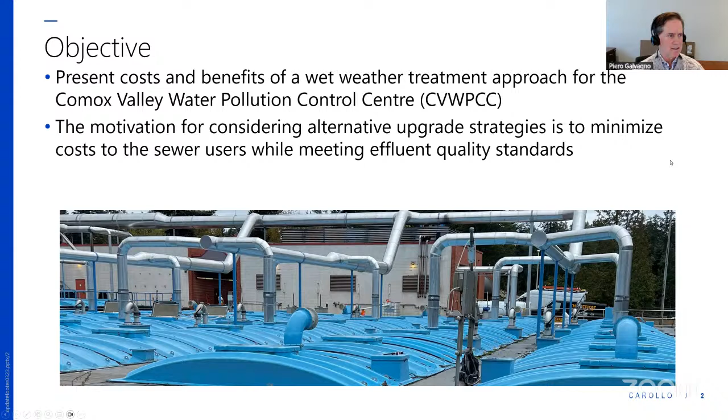So as Chris mentioned, the point of the analysis, the objective was to go into some detail to investigate the pros and cons of a wet weather treatment approach for the Comox Valley Water Pollution Control Center. The motivation came out of considering an alternative to minimize cost to sewer users while continuing to meet effluent quality standards. As a preamble, I wanted to have a few slides to illustrate the problem we're trying to resolve, and why we think in the end that the hybrid approach is the best for the wastewater treatment plant.

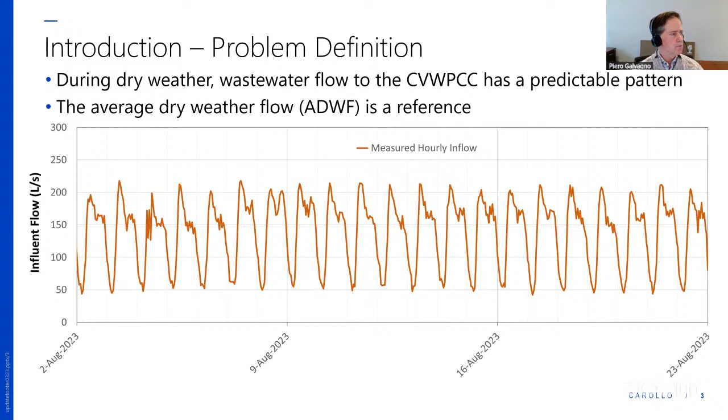So this is dry weather wastewater flow - the wastewater that's generated by the community. This occurs through a period in 2023 through the summertime when there is no rain or groundwater influences. So it's just wastewater, and it's a very regular pattern, very common to treatment plants without a wet weather issue. This is what's known as the average dry weather flow, and it becomes the reference in subsequent slides for how we relate the wet weather, comparing it to the average dry weather flow.

And so this is all flow that the wastewater treatment plant needs to deal with. This chart is kind of the full year of flow to the plant in 2023. What I wanted to illustrate here is that the blue line indicates the regulatory definition of wet weather flow - 2 times average dry weather flow. And what I wanted to illustrate was that most of the flow is below that 2 times average dry weather flow threshold, so it's not wet weather.

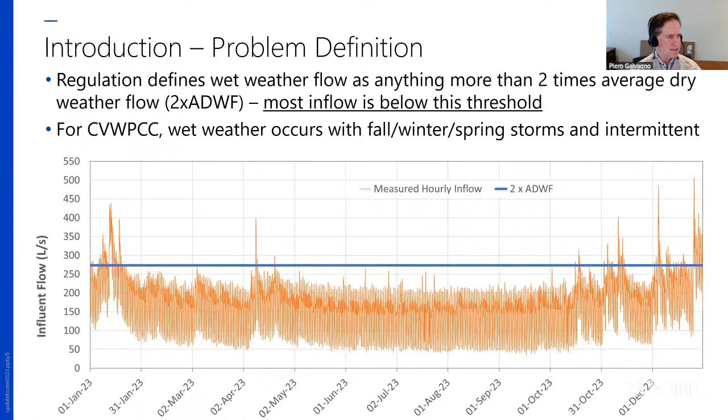So what we wanted to do here was highlight the observation that most of the flow into the plant is below the wet weather threshold. We calculated how much of that volume actually represents wet weather, and historically, over the last 5 years, less than 2.5% of the annual inflow meets that wet weather criterion of 2 times average dry weather flow. So it's a relatively small volume of flow that's wet weather.

However, it has an outsized influence on the infrastructure, on the upgrades of the treatment process. The core of the treatment process is this primary clarifier, bioreactor, secondary clarifier train, and the primary clarifiers and secondary clarifiers are sized based on peak flows. So that 2.5% is really driving the upgrade requirements for primary clarifiers and for secondary clarifiers.

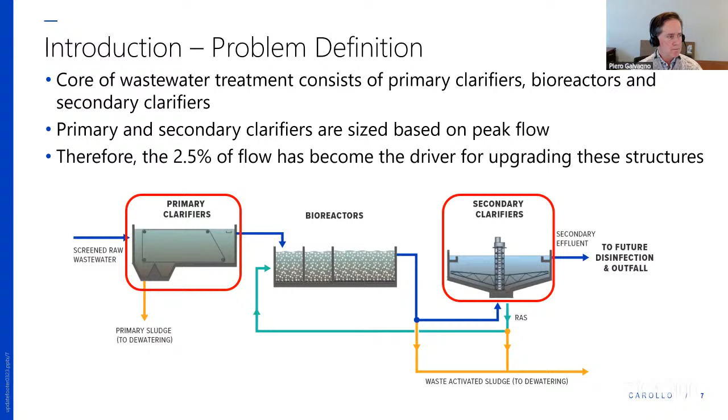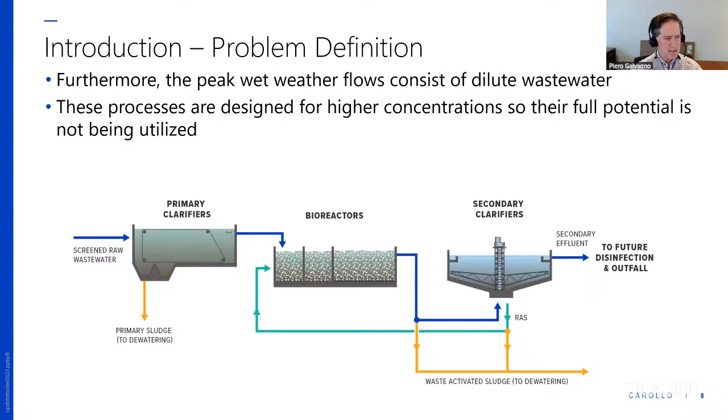And furthermore, I wanted to highlight the fact that wet weather dilutes the wastewater. So what's coming into the plant during that wet weather period is low concentration, but the design of the system is for a much higher concentration of wastewater. So the full potential of the treatment process is not being utilized during a wet weather event. Primary and secondary clarifiers are large concrete tanks with complex piping and associated pumping, so they have a considerable cost when it comes to upgrading.

So as a final slide into the introduction, you look at the aerial photograph of the plant - it's dominated by the secondary clarifiers, primary clarifiers, which are outlined in red, and in between are the bioreactors. The expectation going into the future is that wet weather generated peak flows are expected to continue to grow with population as the collection system expands. That wet weather flow is also going to increase, and adding clarifier tanks is a perfectly logical approach to upgrades, and that's historically how the planning has been done, but it comes at a high cost.

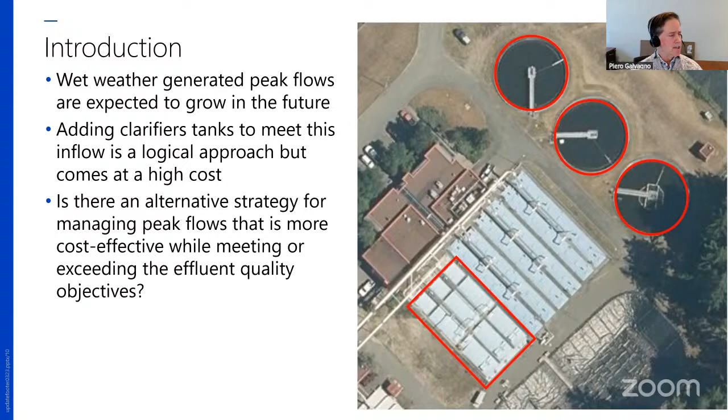So what we want to do is investigate some options that we think could be an alternative strategy for managing those peak flows, and could be more cost effective while meeting or exceeding the effluent quality objectives. That was an important component of this - we want to bring forward options that are the same or better in terms of performance when it comes to meeting the effluent quality objectives.

So there are two options that we brought forward to compare against the baseline option, which is to upgrade conventional primary secondary treatment. The first option is to add a chemically enhanced primary treatment to the baseline option, and the second option is to do this CEPT but also implement a wet weather treatment strategy. I'll describe each of the two options in subsequent slides.

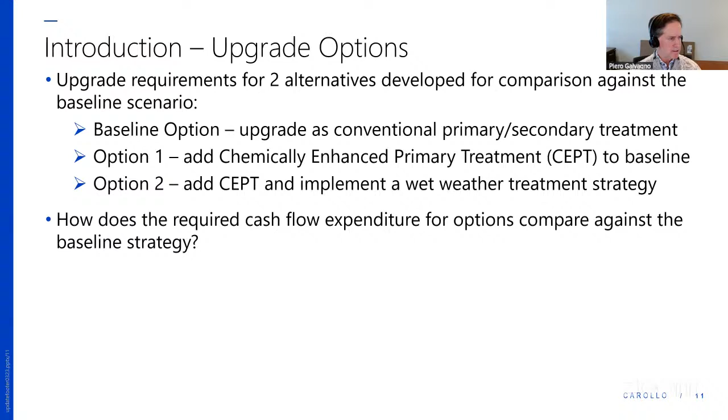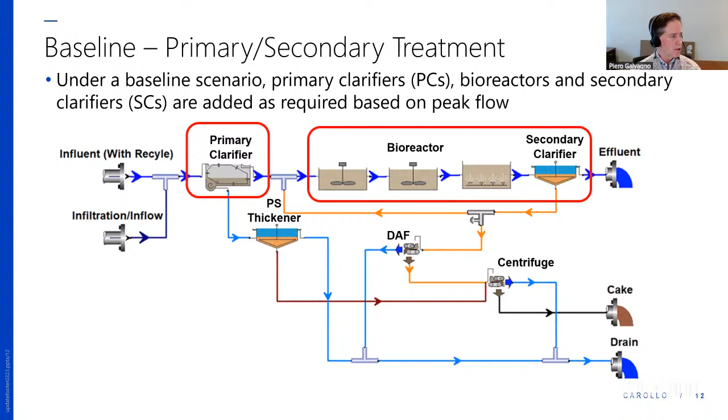Ultimately, what we wanted to do was develop staging plans for each of the three options, then compare how that cash flow for the two alternatives compares against the baseline, and use that as a basis for assessing value. Under the baseline option, we're going to upgrade primary clarifiers, and then the bioreactor and secondary clarifiers, based on the loading as well as the peak flows.

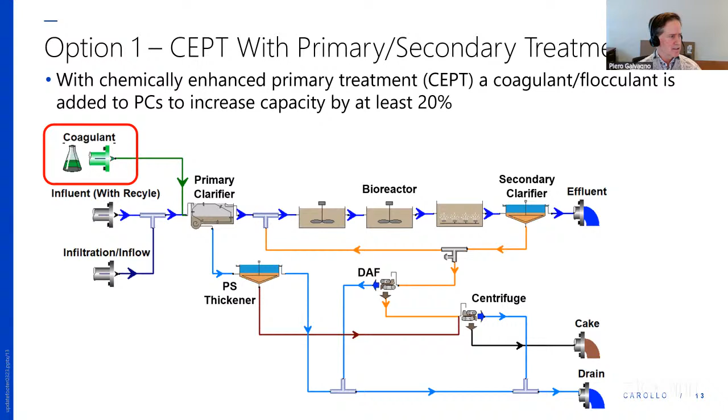Under option 1, this is the chemically enhanced primary treatment. We're adding a coagulant to the primary clarifier, so we're not changing the structure of the primary clarifier. We're using the chemical to give it more capacity, and we think you should be able to get at least 20% more capacity out of the primary clarifier. You're not changing the flow rates, you're just providing more ability for the primary clarifier to meet the settlement objective.

The other feature of this option is that we really only need that chemically assisted sedimentation during the peak wet weather events. So the chemical dosing would only come on when the flow rates exceed that 2 times average dry weather flow threshold, or we're only treating 2.5% of the flow.

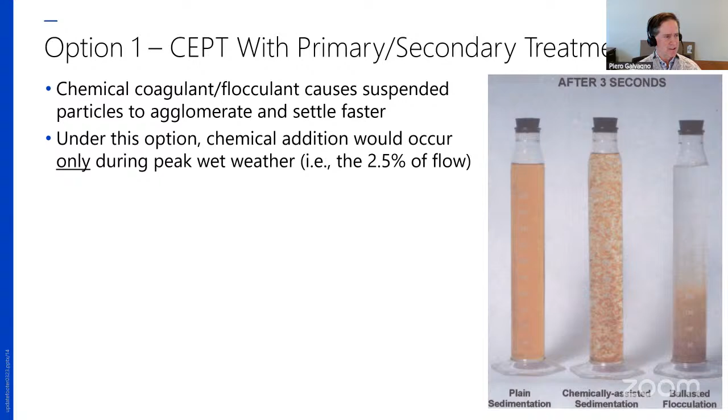Under option 2, the wet weather treatment option, we'd include the high rate wet weather treatment, we'd include the chemically enhanced primary treatment option, but then we'll also provide a bypass around the bioreactor and secondary clarifier, and then we'd add a tertiary filter.

During wet weather, the peak flows greater than that 2 times average dry weather flow would be diverted around the biological treatment and go to the filter, and then it would be the blended filtered bypass as well as the secondary effluent that would go to the outfall.

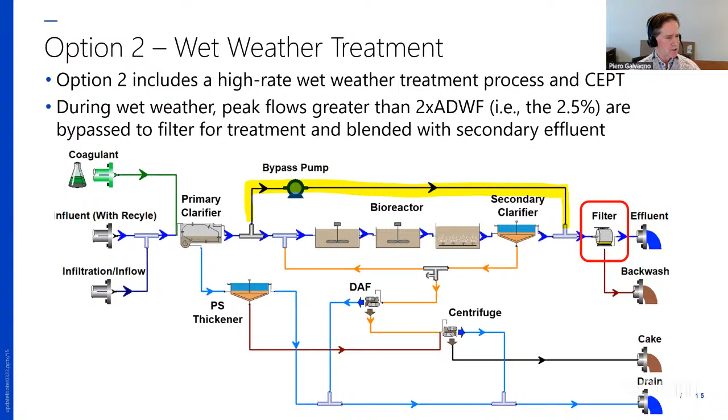So with this option, what I wanted to point out is that we're shaving off those peaks that the secondary treatment train would see. That's the benefit—we're reducing the peak flows during those wet weather events.

So wastewater that's had some infiltration that's been affected by clean water—the effective pore size of the disc filters is 5 microns. As a consequence, it's able to achieve very good suspended solids removal as well as good BOD removal.

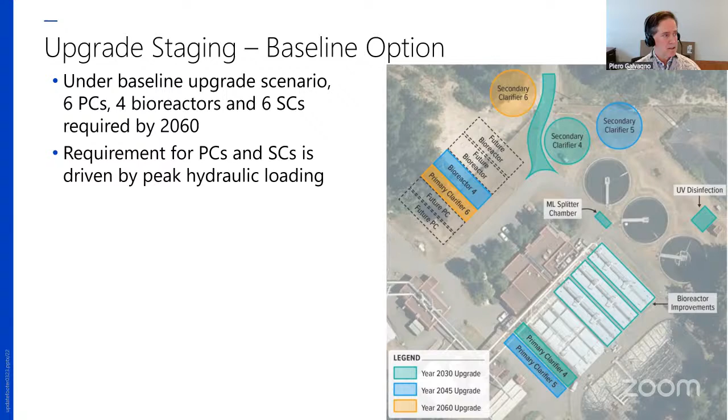So what happens if we introduce CEPT, chemically enhanced primary treatment, increasing the capacity of the primary clarifiers? We see that to get to 2060, we actually only need 5 primary clarifiers. And rather than needing a 4th primary clarifier by 2030, we're able to push that out to 2040. By adding chemical addition, we're able to defer upgrades of the 4th and 5th primary clarifiers, and the 6th one would come after 2060.

Because we're not changing the flows to the bioreactor and secondary clarifier, the secondary clarifier upgrade requirements don't change compared to baseline. But we do get the benefit of the primary clarifier deferral.

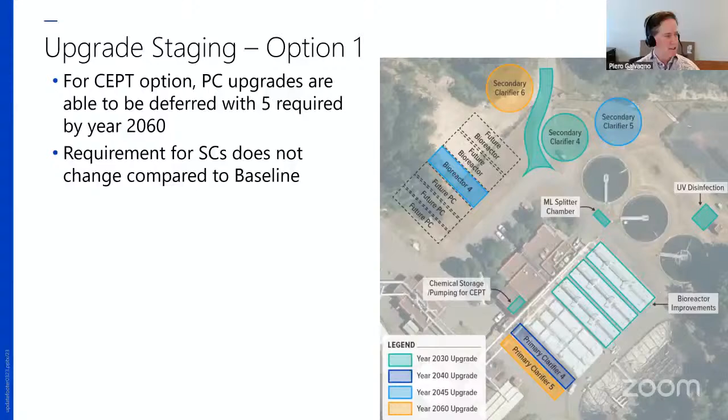With option 2, we get the benefit of chemically enhanced primary treatment, deferring primary clarifiers. But because we're diverting those peak flows around the biological reactor and secondary clarifiers, we're able to control the flows to secondary clarifiers.

We're also able to reduce or defer the requirement for secondary clarifiers. So to meet the 2060 time horizon, we only need 4 primary clarifiers compared to 6 for baseline and 5 for the other option. However, in order to get this started, we need to build a tertiary filter, which has a cost.

So what impact does that have on the cash flow to 2060? That's the question we were trying to answer with this next slide. We developed cash flow and cost estimates based on a class 5 level of detail, and we didn't include upgrades that we know will be common to all options, since solids treatment won't change regardless of which option is selected, as well as the staging of that.

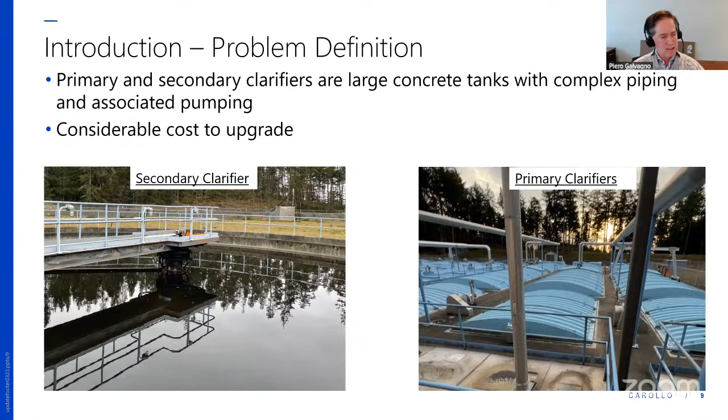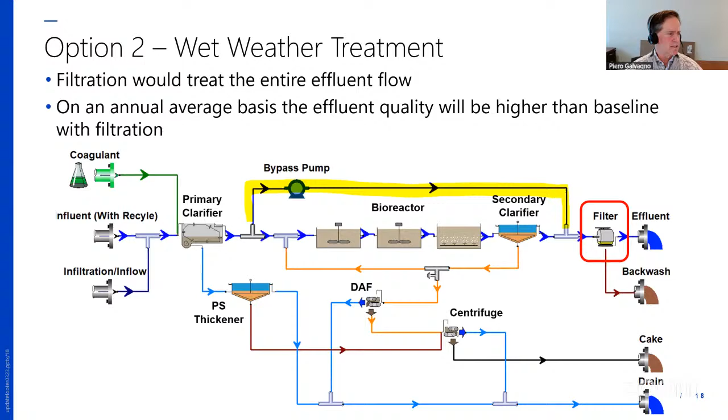With the advent of this tertiary filtration system, it's becoming more common. The McLaughlin Point wastewater treatment plant, which services the Victoria CRD, is based on this concept. It diverts around at some threshold, but it's a different process because it needs to be more compact, though it essentially does the same thing. It's a high rate ballasted settlement process, and then there's tertiary filtration. The Northwest Langley wastewater treatment plant, currently being upgraded by Metro Vancouver, will operate in the same way, with a diversion around the biological reactor to tertiary filtration.

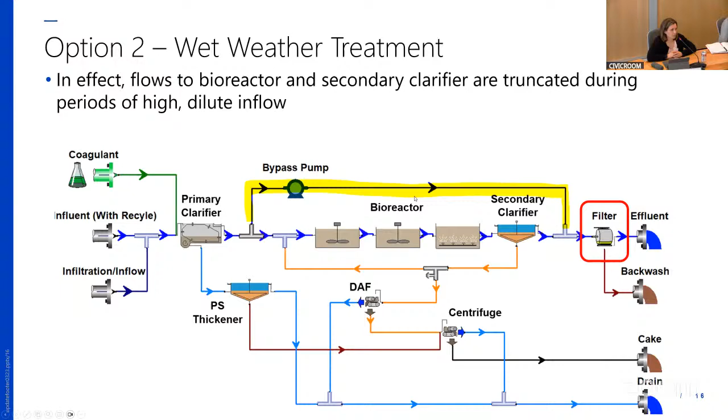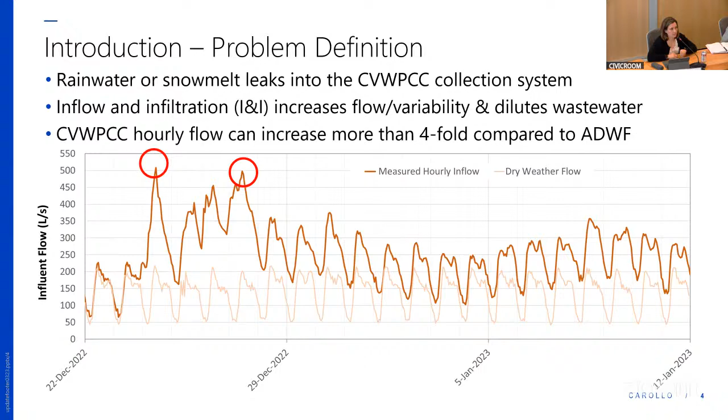Thanks for that. Could I ask another question? On those model charts you provided that showed the dry flows and the projection of storm flows, I think you had a different term for it. You provided the expected average for a month, but then it's maximum per day for the regulation. I wanted to confirm that these are two different measurements. Are we confident that we would still meet the maximum day, even with that monthly average? Because we could still meet the average and have days where we're not meeting it. Just wondering if you can expand on that.

That's why we did this process modeling. We did a dynamic simulation, which required us to develop a month-long set of hydrographs in order to assess that very question. We wanted to be sure. So each of these peaks, this wasn't random - I didn't randomly just throw them on the month. I set it up so that each peak, the maximum peak where you get 4 times average dry weather flow, occurs at different times during the day. In the first one, it occurs in the early morning, the second is midday, and the third is the latter part of the day.

What we see here is that we're getting flows that more than exceed the characteristics of the inflow to the plant, so we're really pushing the boundaries, and still we're fine. Again, like the question around BOD and TSS, we're getting good removal rates with the tertiary filtration. My concern was how the BOD, since some of it is soluble and will get through the tertiary filter, ends up in the effluent. You can see we're still well below the 45. We've done everything we can to be super conservative in the modeling, and we still come out well below the 45.

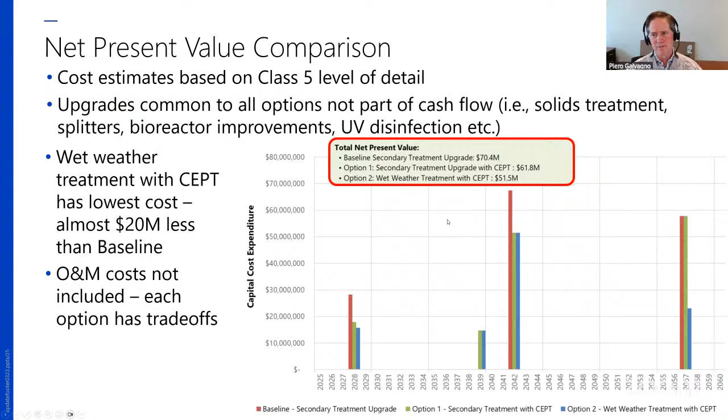No, CEPT has been around for a long time. The use of polymer coagulant has been around, it's a well-established technology. The idea of tertiary filtration has also been around for a considerable amount of time. What's different is that there are now products that have evolved to be specifically for this. Tertiary filtration disc filters have been around for probably about 25 years or so.

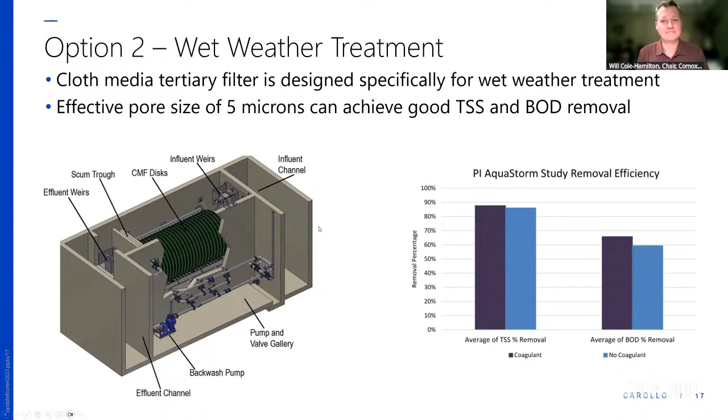And the way I would answer that is that it's really hard to predict the future. However, I think we've got a good basis for planning. We used, as part of the flow projections, the work that's been done by the regional district to address the new bill, Bill 44, for the removal of single family housing requirements. There was a housing needs assessment that was done, so we have very good planning for population projections.

Going out to 2060, you're not going to upgrade unless the population is there, so what we're doing is using this forecast as a way to assess options. But in practice, you would monitor the flow and the loading to your treatment plant and compare it against this projection. If you saw it growing faster, which would surprise me, you'd have to accelerate the upgrade sequence. But if your loading isn't happening as fast, every 5 to 10 years you would reassess the population and also reassess the timing of upgrades. So it's a starting point for planning and for implementation.

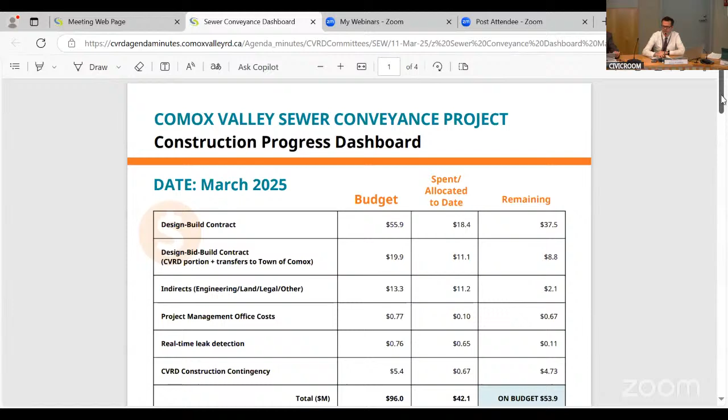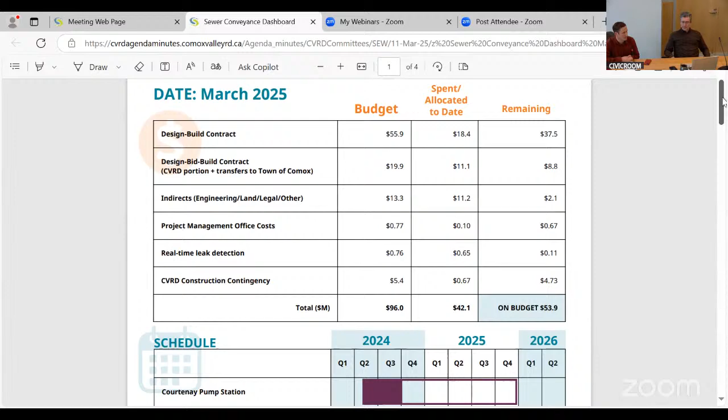Through the chair, this is our monthly dashboard update for the project. Currently we've spent 42 million of the allocated 96 million budget. We're about 58% complete of the force main, so we've passed our halfway milestone, which has been a great achievement. If we scroll down to the schedule.

Pump station construction is behind schedule. They've had issues with ground dewatering. We had a way forward last week and it didn't work, so they're reassessing and should have a new plan coming up for next week. At the Comox pump station, we're scheduled to start spring and summer construction.

There's some updates on the engagement later in the dashboard. The force main from the pump station to Bayside, we're midway through construction and just popped out onto Comox Road this week. The force main from Jane Place to Bayside is moving well along. We're just at Beach right now, doing some pressure testing on this last section, then we'll be moving towards Rodello.

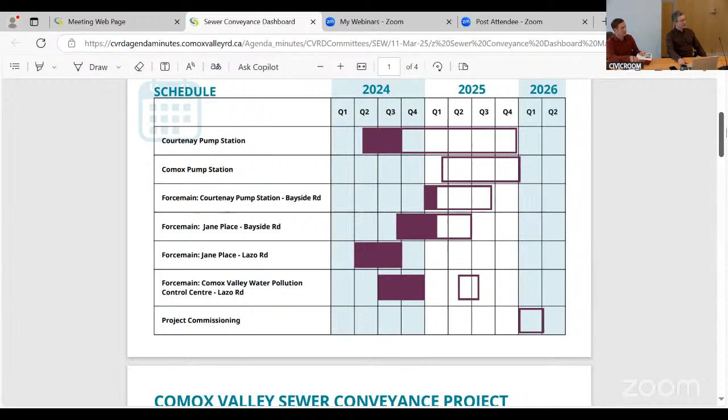Force main Jane to Lazo was completed last year. The force main section from Lazo to Torrance is scheduled to mobilize back in May, and then we'll have project commissioning in 2026. So we can just go to the next page.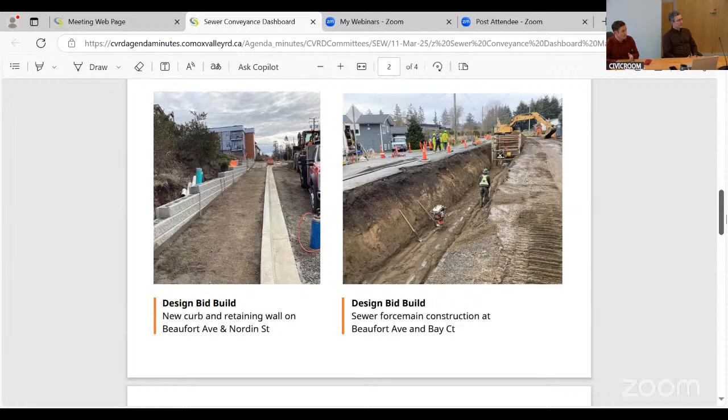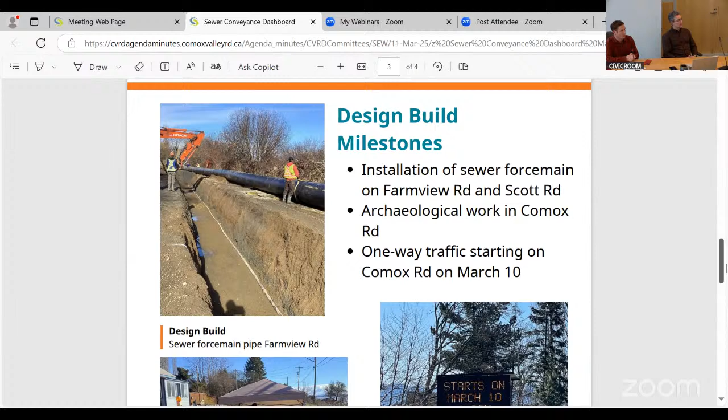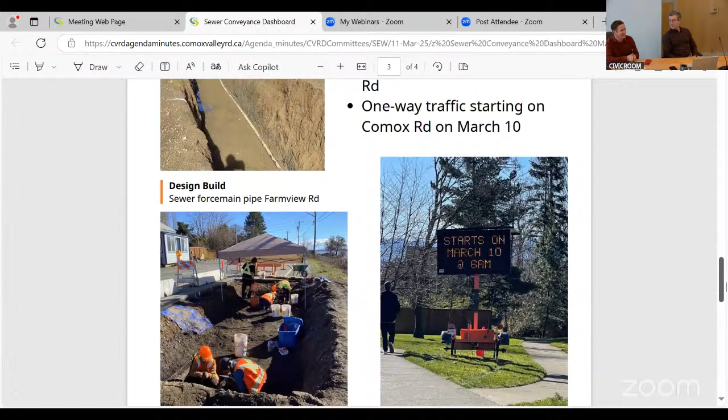In the design build, we've done our installation through Farmview and Scott Road, and we're doing a lot of archaeological work, working with Baseline and Comox First Nations guardians through that. We just started one-way traffic on Monday, and so far we haven't had too many complaints. I think it flowed fairly well yesterday, but there'll definitely be changes to the public over the next couple of weeks. We're monitoring a lot of traffic counting on back road there, so we're actively keeping tabs on that.

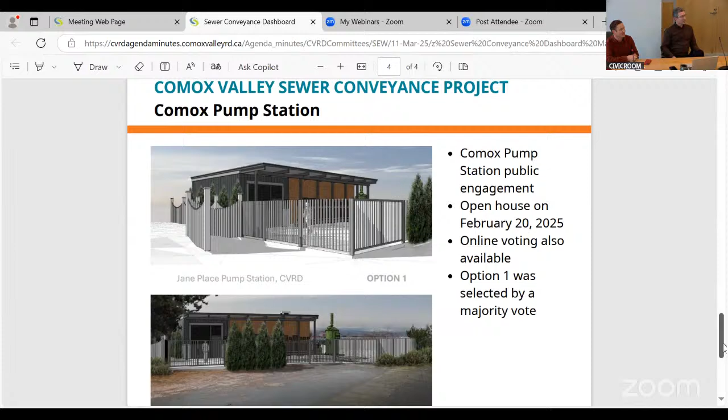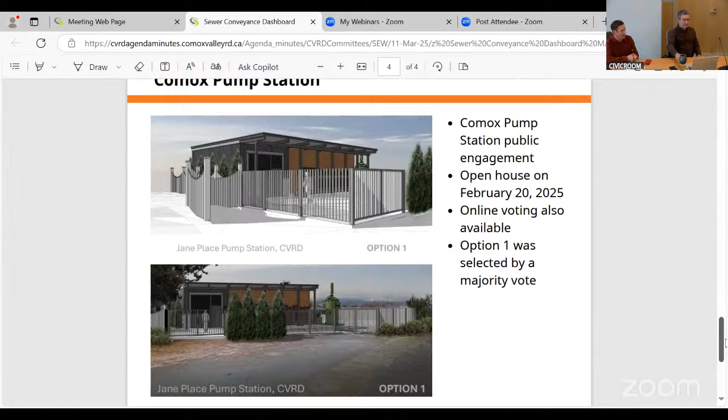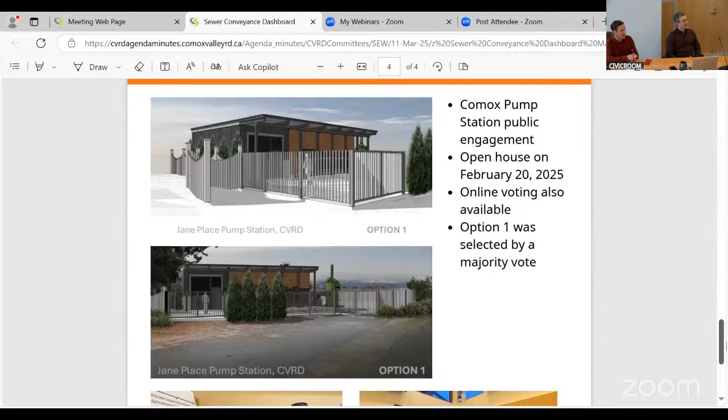We'll ask for a report from Director Minions as to how it is getting back to Comox this afternoon. At the Comox pump station, we had engagement in mid-February with the residents down there. A number of options were provided for fencing, finishing on the generator building, landscaping, and the awning on top. The residents voted, and option one shown there was chosen by the majority. We're proceeding with the town of Comox on permits for this section, and should be starting this spring and summer for construction.

Open to questions. Thanks very much, Director Grant. So I noticed today when I drove into Courtenay that we had two-way traffic going. I was fully expecting one-way traffic, so is that fully implemented? I'm hearing people say it's working pretty good, the odd one saying not, but for the most part people are liking it. I'm just not sure if the plan's fully implemented or not.